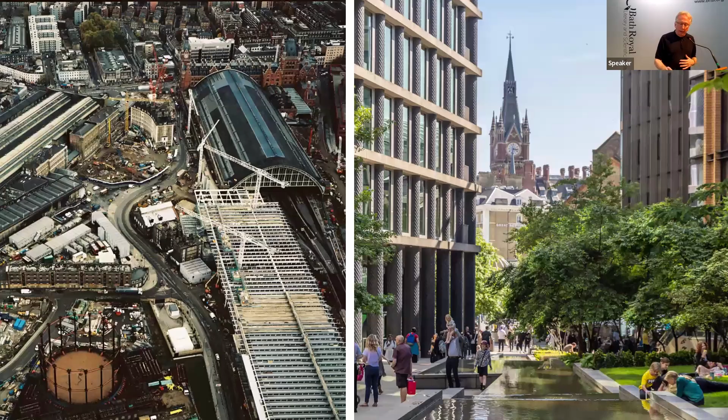And one more picture, just as a kind of contrast. On the left-hand side, you can see the site again as we started working on it. That's King's Cross Station on the left, St Pancras on the right, and that's the new Eurostar terminal, the roof of it being built on the bottom right.

And you can see the complete chaos that existed between the two buildings at the time. And that wasn't just the product of the construction of the station. That was, in a way, a characteristic of how that area existed at the time.

And then the photo on the right is now standing or sitting in Pancras Square, and you can see a few landmarks there, therefore kind of repositioned into the new city. So you can see obviously the tower of St Pancras on the right and on the left.

You can see the Great Northern Hotel here, and here that's the same gable there, and then just in here you can see the German Gymnasium, which is just sort of sitting there in the project. So part of the project was, in a way, while adding new things, very much to give places for some of the historic buildings that we were able to save.

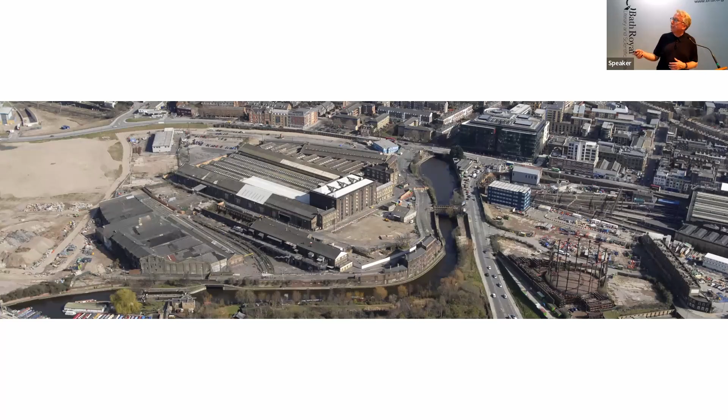Well, many of them, but perhaps the most significant being the granary building here and the transit sheds which lay out behind them. So we kept as many of the historic buildings as we could, more than just the listed structures, through a kind of blindingly obvious realization that these were assets and these would really make a difference to the character of the place as the scheme evolved around them.

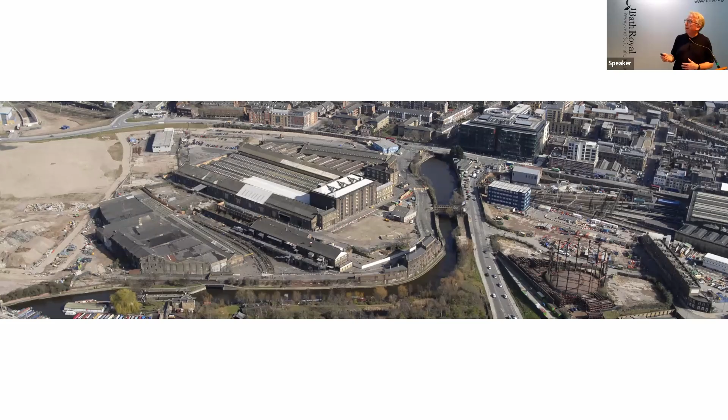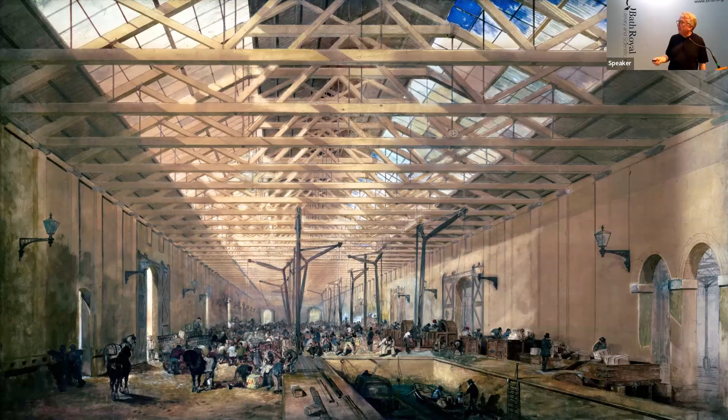And then when you go into the transit sheds on the back, you can just about make out that here you're looking at canal boats, which are now nestling side by side with railway trains. So the goods are being transferred directly from canal to railway. It was the first intermodal transport building to be built in the world. So it's a really important building.

And when you know that that's where the canal basin was, you also perhaps give some meaning to why we put all the fountains there. Because the fountains provide a memory of where the canal basin was, which is important to us, but they are also incredibly important in terms of the role of King's Cross as a kind of social condenser. In another way, it's because the fountains bring families and young children in that the place has been so happily assimilated into its context, which includes very impoverished neighbourhoods really on either side. So the social aspect of the fountains has been really key.

The plan of King's Cross works really through a succession of a series of spaces: from a square outside the station here, a second square, Pancras Square here, and a boulevard connecting to the canal.

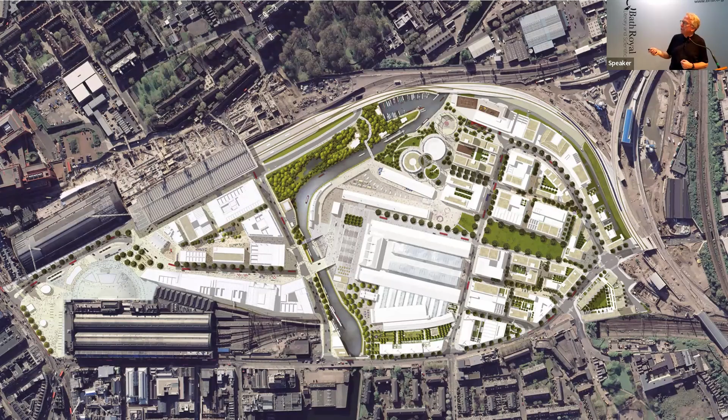Granary Square at the heart of the project here, and then Lewis Cubitt Square and Lewis Cubitt Park leading up to the north. And then a succession of more informal spaces along the edge of the canal, and occasionally a little formal square dropped into the fabric of the buildings on either side.

I've already shown you a picture of Pancras Square, so next is Granary Square. It's interesting because it's almost an as-found space, we haven't really shaped it very much. We have made some little insertions, a little group of trees and a pub on the end, which actually are very important in defining the space in that dimension.

And then, of course, there's steps leading down to the canal, to the towpath. One of the great benefits of building here has been that the end of the towpath, which was really a no-go zone, a dangerous place to be at any time of day, is now absolutely integrated into London's public realm.

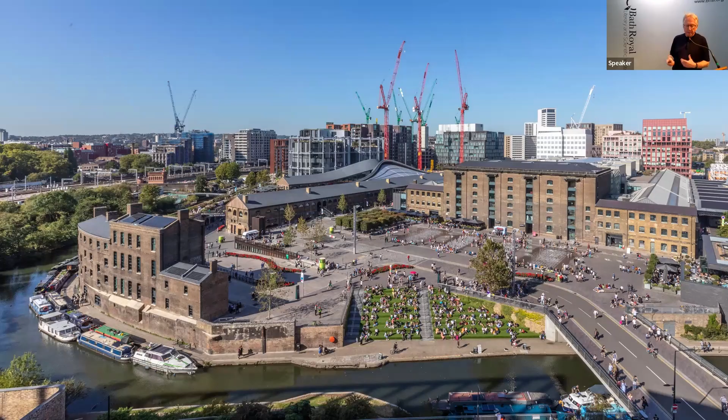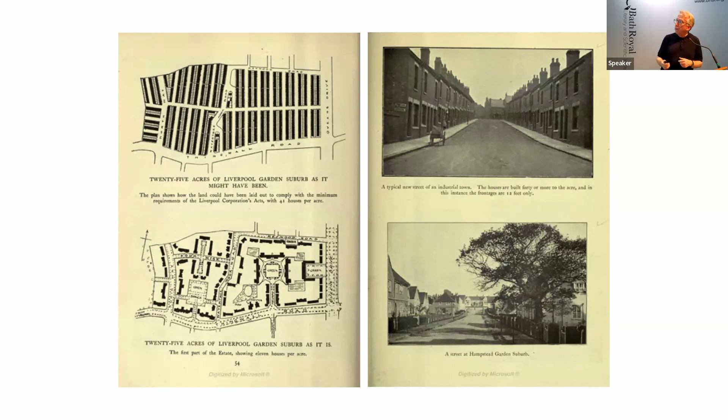And in the 1919 Planning Act, that density became established as a kind of given maximum density for new housing development. And really, it is that proposition which gave rise to the character of housing in the interwar period in this country, and particularly in London.

And it coincided with the sort of Metroland moment—when the suburban railways were being built and more roads were being built. So it suddenly became much easier to get into the centre. The travelling distance wasn't a problem anymore. So that distance could grow, but densities remained very, very low everywhere.

And funnily enough, in Bath, it's interesting when you look at the Abercrombie plan for Bath, 1945, which was obviously a critical moment for Bath, and in a way laid the ground for the sack of Bath to happen some 20-25 years later.

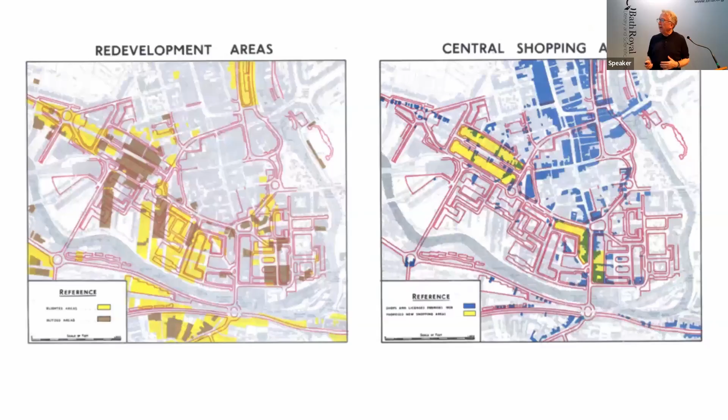Interestingly, I just found this recently, that included in that plan is Twerton. They actually show an image of the plans proposed for Twerton as an exemplar, if you like, of how housing might be built. And in the end, of course, Twerton isn't really an exemplar.

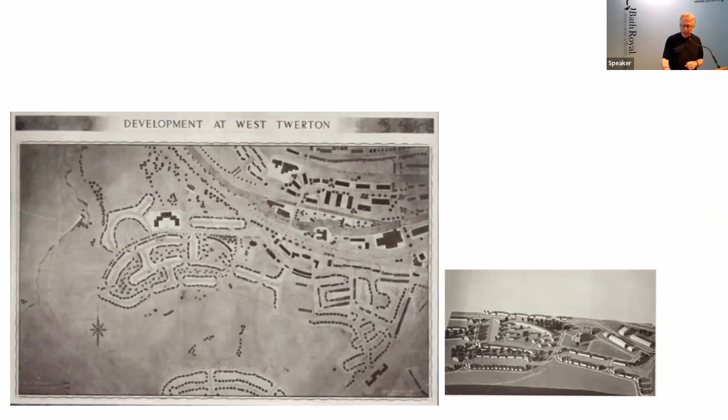It's actually, in a way, that density is part of the problem, I think, in Twerton. Just having more open space isn't enough. In the end, it is about the relationships of buildings to open space, of roads to open space. It's about movement and overlooking and all sorts of other things which go together to make successful housing.

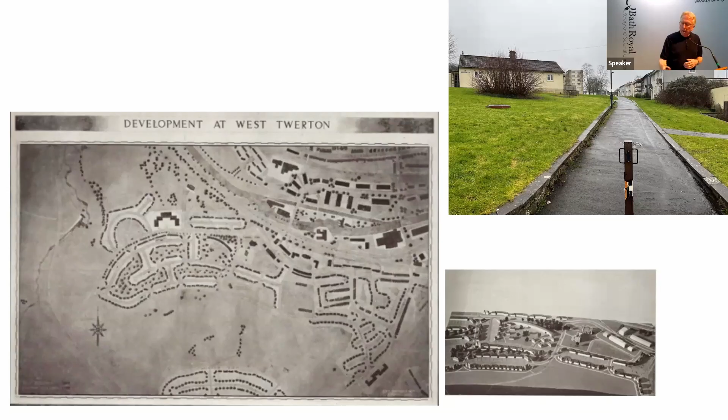London, having reached this point where it's growing within the whole of its borders, has a problem which you're all familiar with here, which is that it's surrounded by a green belt. So it has no room to expand, it's reached the limits of expansion. That's why the opportunity areas came about, because the only way of growing London was to increase the density. That became the only option, to look at parts of London where the density should grow.

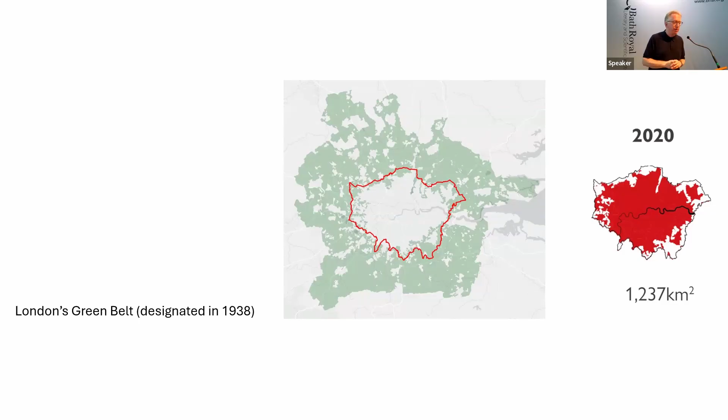So the opportunity areas are saying, well, if they're going to grow, the places for that to happen are where there's really good public transport. That's the only place we should be doing it. So we look at all those areas where there's stations, where there's capacity to build around stations, and we should let the population grow in those locations.

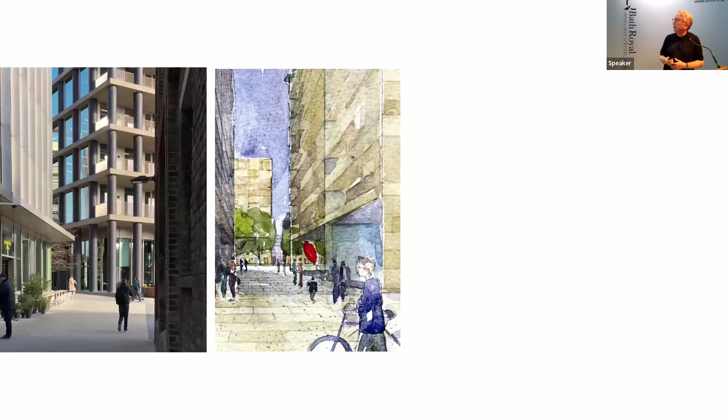And at King's Cross, certainly in the southern half of the site, we tried to work with that sort of scale, those kind of dimensions. And in the end, I think it's one of the things which has given that part of King's Cross a sort of human scale.

It's a kind of paradox, isn't it? We're putting things closer together. In planning speak, these are canyons, this is a canyon effect. Normally it's dismissed for that, but actually what it's doing is creating atmosphere and a sense of an easy place to be.

Actually, I could point another Eric Parry building out. There you go, there's another one.

And also it's meant at King's Cross that we try to make sure the things which in other projects have been assumed to need a huge amount of space, like a primary school, we've tried to draw into the heart of the city in this way, where we have a lot of people now living around about it. So these are the children of the primary school.

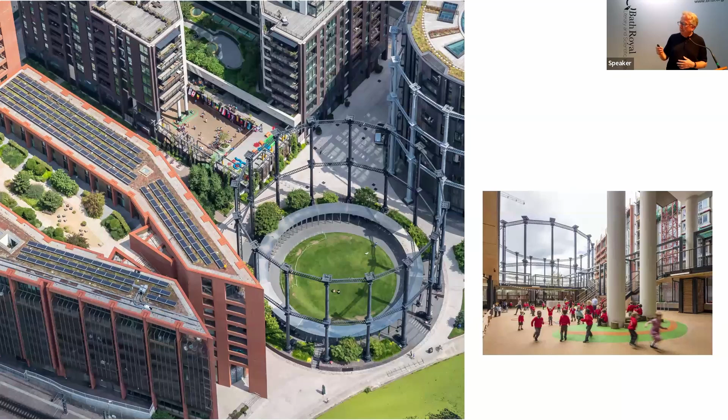They were playing in a park made out of one of the gas holders, but their actual playground is there, and the school is sitting underneath one of these residential buildings. And it's a fantastic combination.

The school works incredibly well for the school, and it works very well for everybody who lives and works around about it. And my particular pleasure from this one is that it's not just one school, there's two schools - a primary school and a school for deaf children co-located on the site. And because they're co-located, all the primary school children learn sign language. It's a rather wonderful outcome.

Now, in a way, building in the heart of London is one thing, but the opportunity areas are saying you've got to look at other areas to build more densely and taller as well. And this is Tottenham Hale, which is to the north of London, on the main railway line to Cambridge. So it was one of those areas where density was required.

We're actually sitting on the Lee River here, hence the barge, and we're opening out across another bridge to a natural park, to an open landscape to do with the reservoirs and the river.

And along the canal there, you can see, I think these are probably 8-story buildings. So it's a relatively high scale, but in a sense quite appropriate in terms of its wider context. But as you go into the scheme, you can see there are taller buildings again. So this is a significant jump in scale.

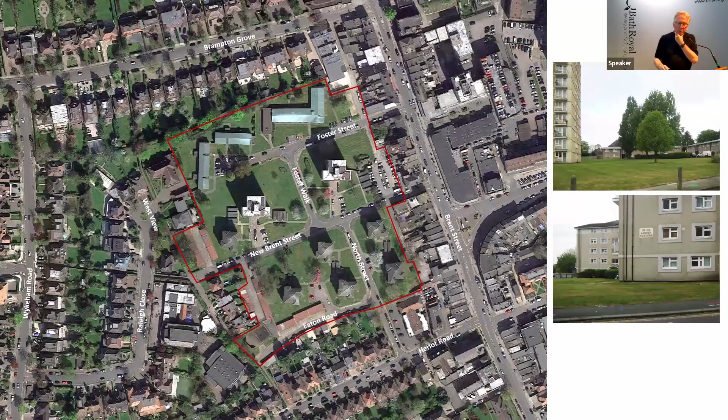It's interesting here that the tall buildings are private, built to rent, and all the social housing is actually in the lower buildings, which I think makes sense to me. It's also meant that we've gone back into areas developed in the 1960s and tried to think again about how they might evolve and how we might build more homes in these locations.

This is a project for a council, Barnet Council in North London. You can see the red line of the site, and you can probably begin to work out yourselves what's happened here. You're sitting in a late 19th, early 20th century part of the city, with a lot of rows of terraces and a very strong street grid, east-west. You can see that street grid surviving in part across the scheme.

Then at a certain point in the 60s they cleared away what were probably seen as slums, and opened up the landscape. They made a big space, and then placed within it a series of new buildings - some L-shaped, some taller, others dotted around the landscape.

That's roughly what the space looks like. But around the edges of the space, it was chaos really, because all you had was the residual - what was left after the buildings were cleared away. So although housing was being built there, the place that had been made was very unsatisfactory. It wasn't a complete failure though, and for the residents it meant something.

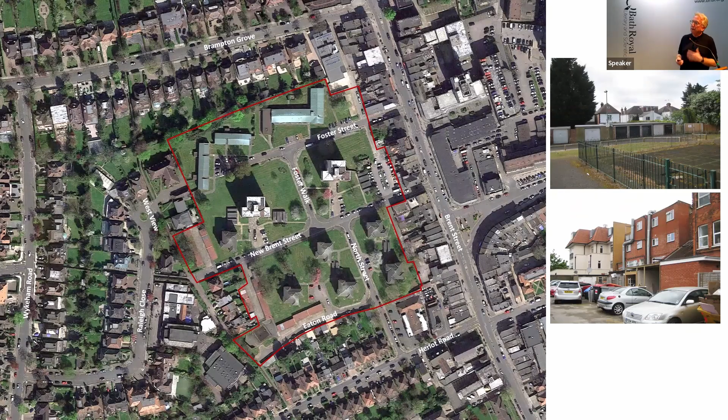That was one of the things we had to learn as we began to work on it. This was a project where we worked through probably a year of consultation with the people living on the site, exploring the best way of adding new housing, which obviously raises a question - you're giving up green space to build housing. Is that the right thing to do?

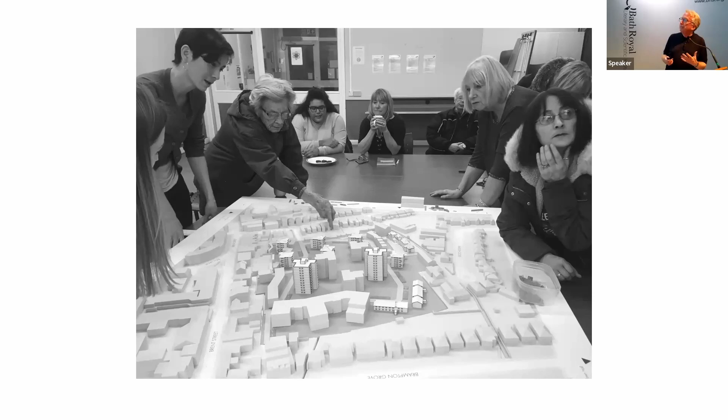But by making this investment we were able to invest significantly in the whole site, which is really what the residents ended up realizing and wanting to buy into. To our surprise, the scheme we ended with was not the scheme we began with. We began thinking we might take the freestanding buildings and conjoin them to make courtyards. We also wondered about just reinstating the streets - could we put the streets back and make sense of that?

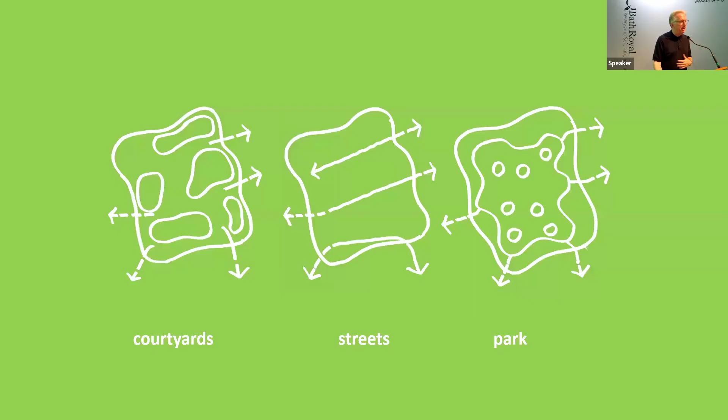But in the end, the last option was the one the residents were most interested in. Could they keep their park, but could we make a much, much better park and a more successful relationship between the buildings? And that's exactly what we pursued.

So in this overall plan you can see we've added one, two, three new buildings into the park, but a lot of effort has gone into remaking the edge of the site so it's now a space with a very clear perimeter. Everybody's looking into the park, so the community is, if you like, built around the park.

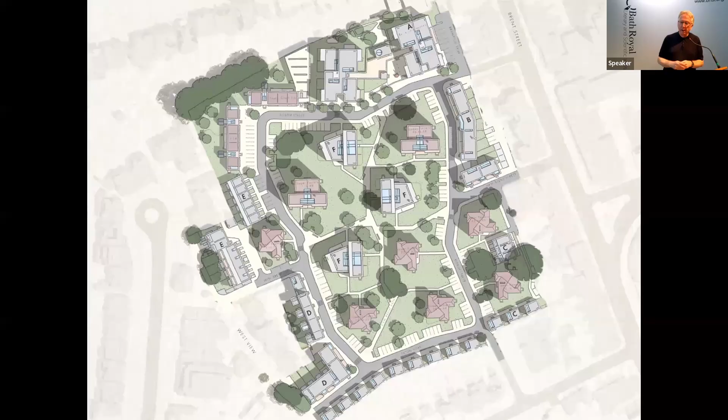It's a little detail, but it's the sort of thing which does make a difference in the end - it's what architects can do. If you look at the plans of the buildings built in the 60s, they're always aligned north-south. That was the one convention - you forgot about the plan of the city and just aligned things north-south. It's very common.

They were aligned north-south and really had no spatial relationship - the positions of their facades had nothing to do with the landscape that surrounded them. Whereas the buildings we've proposed, you'll see they all have two geometries inside them.

They all have the north-south geometry because we want to find relationships with the existing buildings, but they also all have this east-west geometry related to the original streets, which influences a lot of things about the positions of the buildings on the edge of the park.

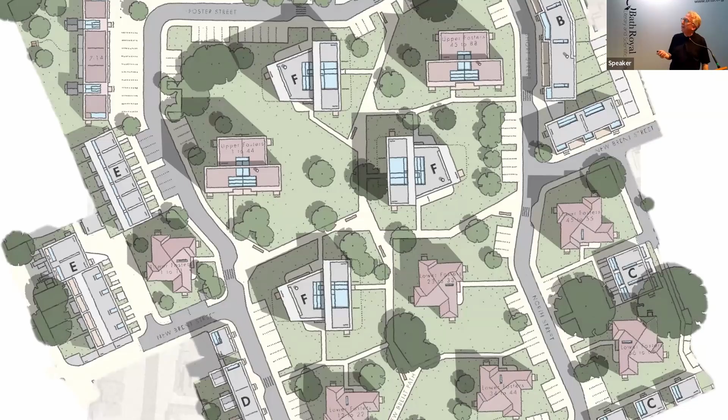Because of that, we hope—this project is still on site, so I can't quite convince you at this stage—but what we're trying to do is make sure we're generating open spaces which have a kind of order to them because of the relationships between the buildings. That little trick in the design of the building is something that does that.

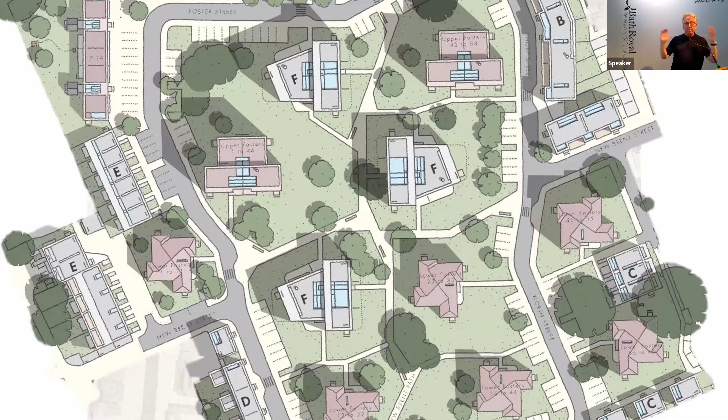For me, that's a fundamental point which I think very often gets neglected. Buildings, of course, have to house things inside them, so their plan is generated to a great degree by how they work internally. But buildings are also fundamentally the things which define external space—that's the other job they have. Architects should always be thinking about whether they're making the best possible external space as well as the best possible internal space.

One of the things that followed on from King's Cross—because it began in 2000, it wasn't really inspired by sustainability. Sustainability was there then, we knew about it, we were thinking about it, but it wasn't quite the kind of force that it is now, since the climate emergency has become more important.

So when we look back at the master plan and the evolution of King's Cross, it was clear that when we took individual buildings, we really could achieve very high standards of environmental performance. Many of the buildings at King's Cross are BREEAM outstanding—getting that level very high was quite easy.

This is a page I think I've taken from Transition Bath's website, but this is just the statement about the fact that Bath has the highest home efficiency standards in the UK. So you can push these standards very high, which is what's happening now.

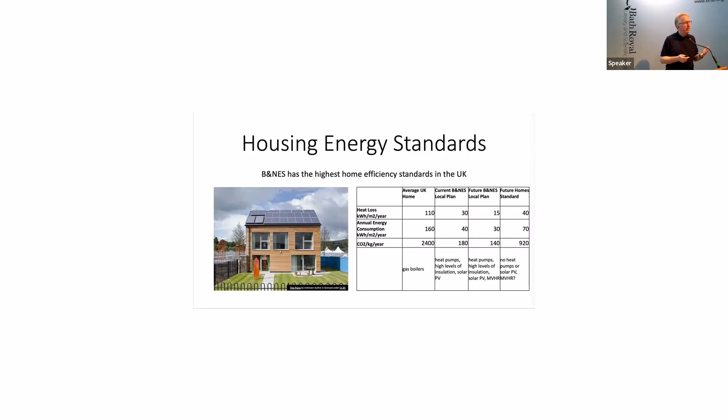But it's actually much harder really to say, well, what do you do when you're designing a master plan or designing a piece of city? What is it that then shapes the way that kind of thinking plays out? And there are lots of things you can think about.

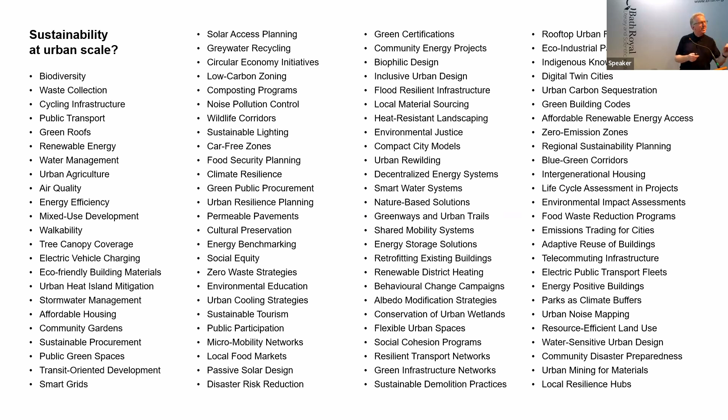So there's no shortage of things to consider when you think about a city and how to make it sustainable. But in a way, not all of those are actually going to help you in the end decide what it is that you're going to draw. They're not quite getting there—they're more sort of policy things.

So I rely on this argument about sustainability, which is a very simple one: sustainability means making the most of what you have and reducing what you need. That's a kind of imperative that I think drives the way we have to think.

So in a master plan now, we begin by looking hard, as we did at King's Cross, at all the buildings that are on the site. We want to see what we can get out of those. So now we don't just keep beautiful historic buildings, we keep all sorts of rubbish—actually, we keep all sorts of buildings that have just been built for whatever reason, acknowledging the fact that they can have an extended role.

I mean, I say all sorts of rubbish—that's what they felt like when we first saw them. Of course, they'll be wonderful once they're dealt with.

And the other thing which I think is fundamental is the issue I've already raised, really, which is about density and the fundamental need for us to try and build more compactly, particularly when we build housing.

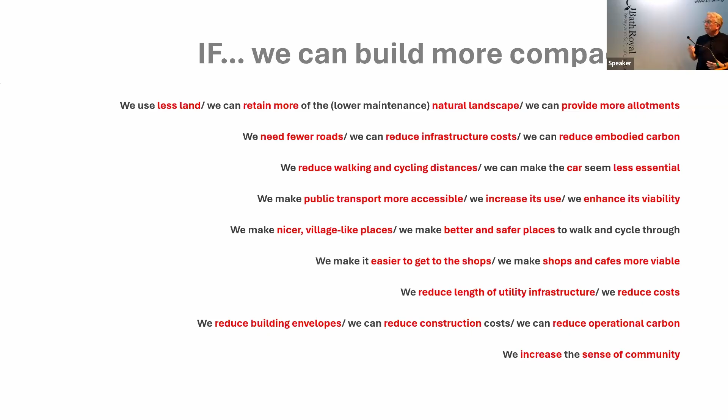This is a list—I have no idea whether you can read any of that, but I'll pick out a couple of things. If we could build more compactly, we use less land, we can retain more of the natural landscape, we need fewer roads, we reduce infrastructure costs. We can make the car seem less essential, make public transport more accessible and more viable, make nicer village-like places—in my terms, we do. We make it easier to get to the shops, so shops and cafes become more viable, we reduce building envelopes so we reduce construction costs, and we increase the sense of community. These are all trade-offs, I think.

That sort of thinking wasn't done by me about this project, actually, but about another project elsewhere, trying to think about the arguments for building compactly. But it seems to me it's certainly one of the big issues Bath has to think about now, because there's a requirement to propose land for 28,000 new homes across the area for a 20-year land supply. That's a huge responsibility, and thinking about what that means becomes a key part of the planners' job, but also something that exercises my mind in the role I've got.

I think this whole question of sustainability, and how it impacts the world for us architects and urbanists, but actually for all of us, means certain qualities suddenly become uppermost. Things have really changed around in the way we think.

I was on a design awards jury recently, and it occurred to me that when I'd been on one about 20 years ago, everybody talked about things not being generous enough, and praised the generosity of things. Now on design awards, people talk about the economy of the structure and the minimum use of material, and the whole sense of what is right, what should we be doing, how should we be designing. It's absolutely a moment of transition, to use the word. So something is happening at the moment.

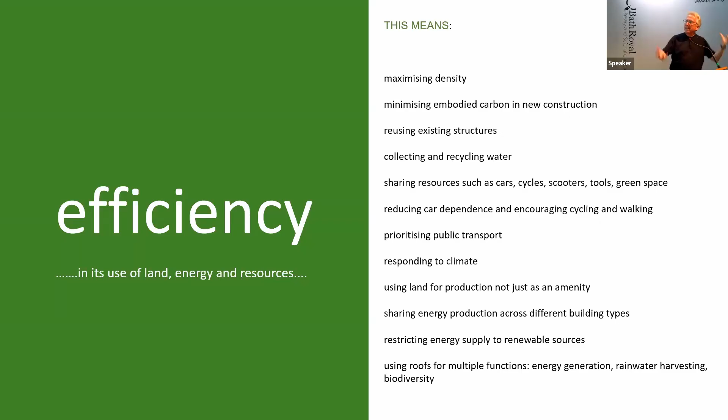So efficiency is incredibly important, and connectivity too, I think, also incredibly important. It's important everywhere, in cities, but I think it's a particular challenge across North East Somerset. How do you achieve that level of connectivity and movement for people where the car is so dominant? What are the alternatives to that? How can one deal with that?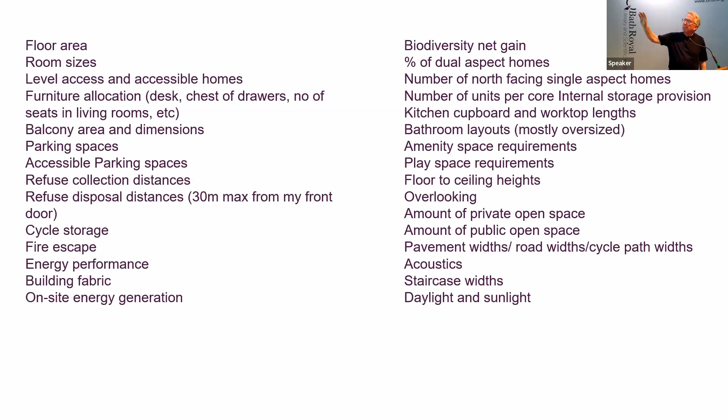It is a kind of curiosity that when you look at housing design in this country, it is hugely regulated. There are an enormous number of standards which define everything about the housing you design, from floor areas of individual units - these are quite precise numbers you have to conform with - room sizes, the sizes of balconies, how many cycles you have to accommodate, the energy performance of the building, the nature of the building fabric, the amount of amenity space you have to provide, overlooking, private space. All these things are firmly regulated and standardized.

And of course that's a really good thing, and yet it's also a slightly difficult thing, because as we all know, once you have a minimum standard, that becomes the norm. So everybody builds now to one standard, which in a way is a shame, but it's hard to know now how to overcome that.

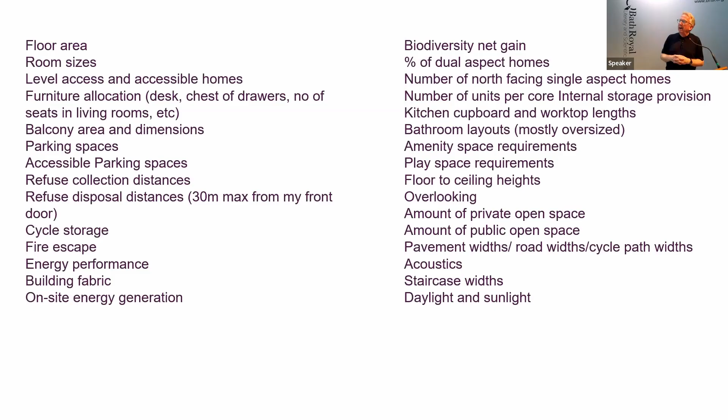But what is really striking is that there's no equivalent standard for the provision of public transport to housing. There's nothing which says, we'll build here and promise to give you, within 15 minutes' walk, a bus service every 15 minutes running for 15 hours a day. There's no quid pro quo saying this is what we'll give you in order to allow you to live here. I think that issue of public transport has to be tackled by somebody somewhere - I guess in the end it's government - unless public transport is taken much more seriously than it is at the moment.

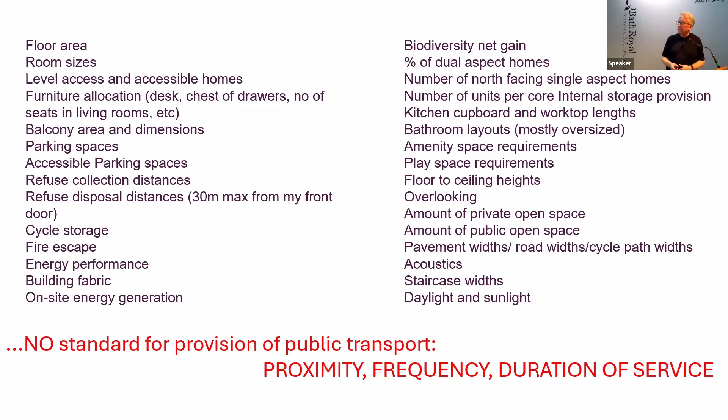Really, ever since Thatcher and the privatisation of buses, it's always been on the back foot in this country. And if public transport is going to work, walkability is absolutely key to that. Walkability is an odd word because it's not really a quality itself - there are characteristics you're looking for to make something walkable.

I think the fact that walking becomes the nicest way of moving about is really important. And of course, it's also a virtuous circle. If more people walk down a street, then the cafe located there trades better, and more people want to go there, and so on. So thinking about walkability is fundamental to projects at every scale, whether we're talking about a village, a town, or the biggest city. Walkability is still a fundamental aspect of all urbanism. How do we achieve that? How do we make that work?

The great campaigner on behalf of walkability was Jane Jacobs, who some of you will know well, others won't. She wrote this extraordinary big book in 1961, and she was a campaigner against the demolition of huge areas of New York tenement housing. She was the first person who really recognized that in that housing, in that urban structure, there were physical qualities and social qualities which should be protected and preserved, providing a very sound basis for a city. And she was absolutely spot on.

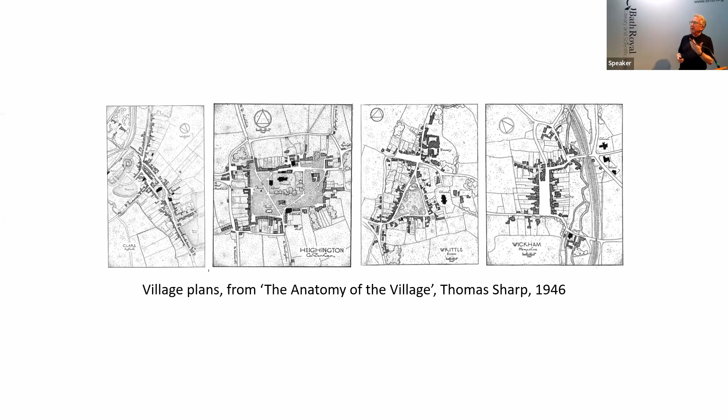He was also vehemently opposed to the Garden City. He fought it all the time because he felt they were misleading themselves in thinking you could bring the city and the countryside together—that was a mistake. In the end, there were qualities in the countryside and qualities in the city, and he wanted to really understand what they were. He produced beautiful studies of English villages where he plotted and drew them just to understand their spatial configuration and how the centres of these villages were defined, as a deliberate process of beginning to think about how to design housing. He had one or two very modest commissions to design new villages up in Northumberland, which in the end hardly came to anything.

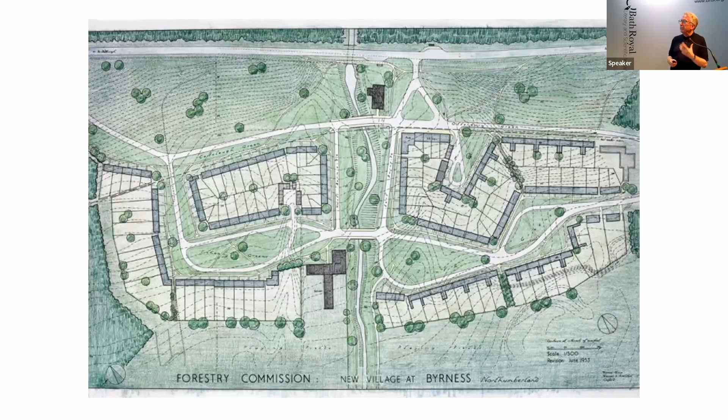But interesting plans, and interesting how his interpretation of what would make a successful village in terms of its enclosure is followed through. So, I'm getting there.

One more point about qualities or characteristics which now seem much more important than we'd realised before, and this is diversity. In particular, what's important to us at King's Cross is the incredible mixture of uses within the site. It probably began—we all thought it would be housing and offices, that was sort of easy. But in the end, with an incredibly imaginative client, there's nearly everything there: a swimming pool, a gym, a library, a hotel, local authority offices, schools, university buildings.

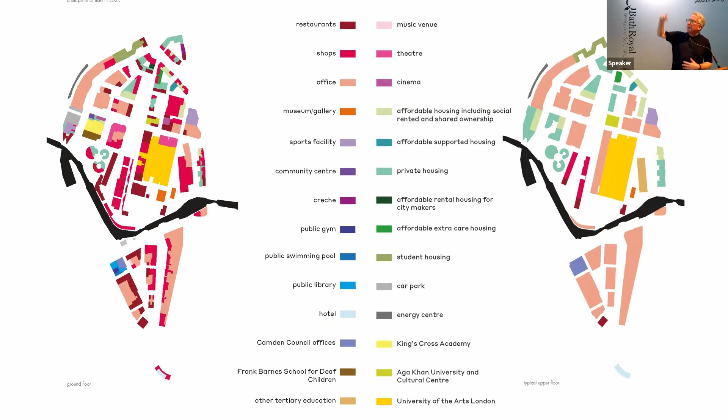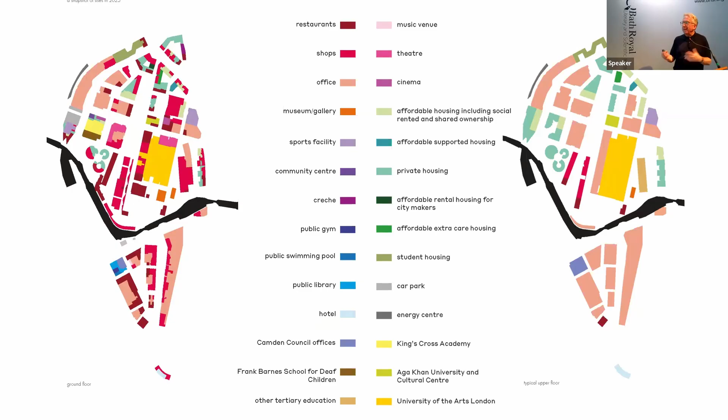There's all sorts of different types of housing, all sorts of different tenures of housing, so people from different generations living there. There's no question in our mind on projects that we go forward with, that sense of the mix of things is really what enriches places and where we can achieve that. Of course, you can't always. There's also another type of place where you have to think, what is a residential environment? But there's certainly this sense of diversity being a strength.

So I think that's a real strength. It's interesting that a city can be all these things at once, and that's a kind of goal that we should be aiming for. And just a reminder, really, that this is completely the opposite of what Abercrombie and his contemporaries were imagining was going to happen in the future.

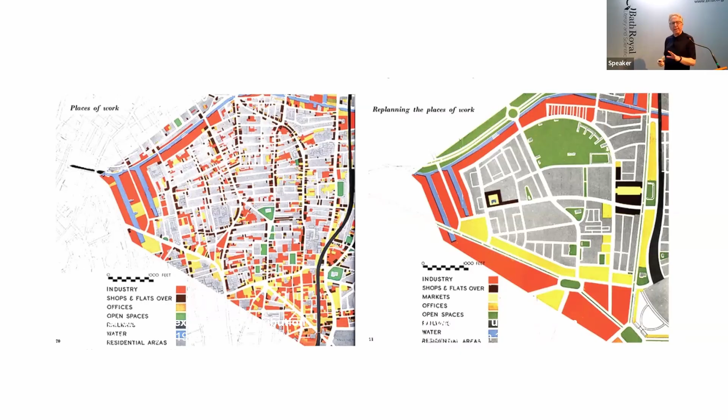These are drawings taken from Abercrombie's London plan, which he did a couple of years before Bath. On the left-hand side is a study of Shoreditch, in which they recorded all the different uses that were on the ground. Looks a bit like our King's Cross plan. And on the right is how they thought it should be replanned, with every usage put together into different areas within the city. So they were headed in a completely opposite direction at that point.

And that idea about how to organise things came through in documents that were put out immediately after the war, in '46 and '47. This is taken from one of those, where you can see on the left-hand side the survey area. I mean, these are pretend, these aren't real. So a pretend survey area with a kind of chaos of things going on in it. Then the introduction of a new road system in the middle drawing, and then the organisation of the uses around that. So there was a kind of rational move going on there.

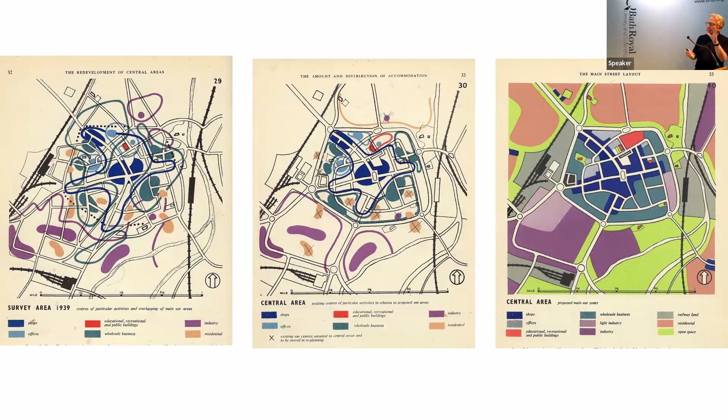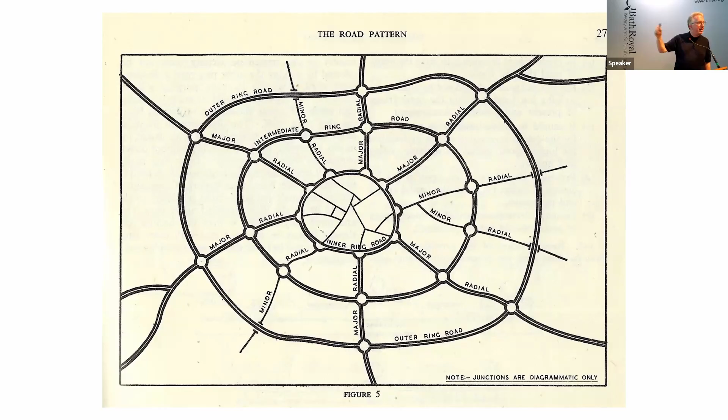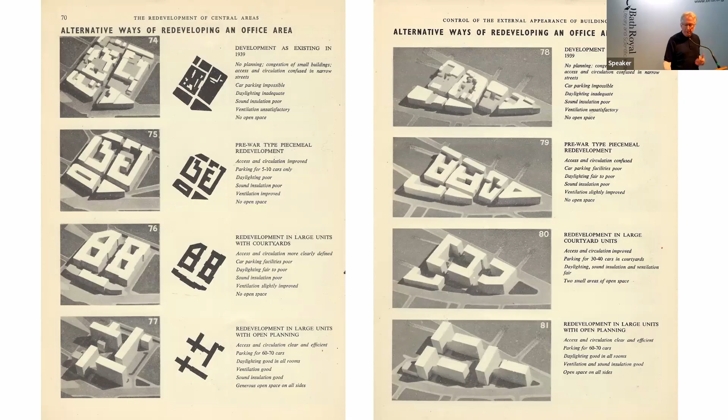The two documents I'm referring to are this one, Design and Layout of Roads in Built-Up Areas, 1946, which was the document where the idea of the ring road was really put into British planning, and became a given for any city embarking on this. The second one was the redevelopment of central areas, looking at the hearts of towns and cities, seeing how the chaos they were witnessing, this density in existing towns, should actually be replaced ideally by buildings like this, pulled apart, placed apart from each other, with open space in between, and of course with no sense in which they were playing their part within the city. They become a kind of completely internalised organisation.

Those documents weren't compulsory, they were advisory actually, but they had a huge impact on cities all the way across the country. The one on the left is Reading, the one on the right, I think, is Northampton. For me, to try and characterise it, I feel what happened was a kind of aspatial urbanism. In other words, an urbanism in which you weren't concerned with the way in which buildings made external space. You were interested in buildings and maybe landscape, but not in the way they made external space.

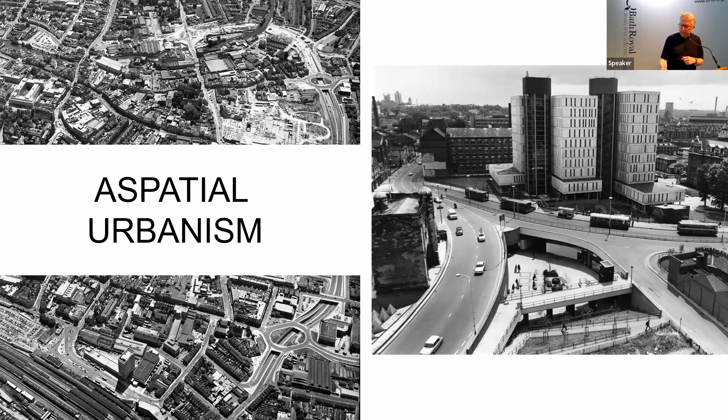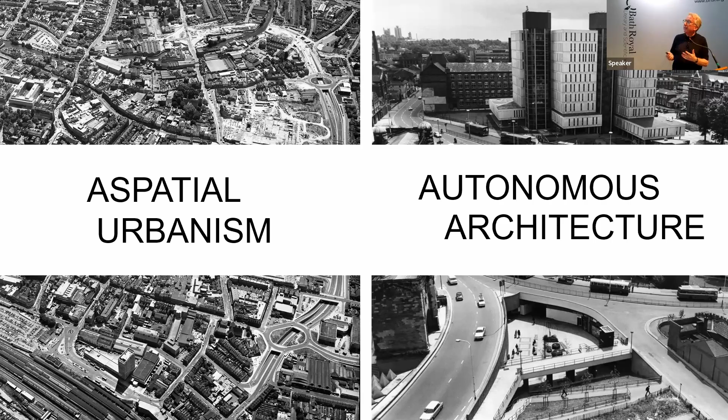And then in terms of buildings, it was what I would describe as autonomous architecture. In other words, an architecture which was internally driven from its own logic, its own internal logic. It wasn't thinking about any of its external relationships. For a long time, that, I think, did characterise development in this country, and to some extent, all the way over the world. But I think already that has changed.

Of course, in Bath, you were lucky, you escaped most of this, but you do have Pines Way, which to me is the one shock horror moment in Bath. There's a big road gyratory sitting in the middle. So if I could do anything in Bath while I'm here, I'd love to try and find a way of changing the nature of Pines Way.

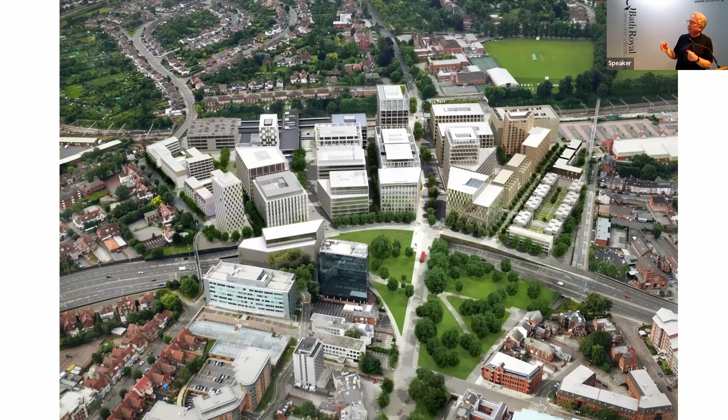What we've been working on over a few years now is a development of the land around the station, but also the replacement of that junction and the creation of a land bridge which connects the station and that development through into a direct route right into the city centre. Some of the buildings, two or three, are now built, but the landscape is now complete, and that connection between the station and the city has now been completely remade.

Now, Bath is clearly the antithesis of aspatial urbanism and autonomous architecture. I mean, it's absolutely exemplar of a place where the buildings create spaces. That is what it's all about, and that's why it's so absolutely extraordinary.

And in a way, it's the square and the circus and the street which connects it. I think the crescent is particularly interesting because if it was simply part of a circle, it would be okay. But what's amazing is that it's part of an ellipse, and that it curves back around and completes itself and produces these flat kind of palace facades onto the landscape. So it's an incredible piece of urban thinking, I think.

And although you might say, well, is it enclosing a space? It's looking onto the landscape. Absolutely, it's enclosing a space. To me, it's really doing that job in an extraordinary way.

But of course, Bath, it's not just that little sequence, it's everywhere in Bath. As you all know, this extraordinary succession of amazing spaces being built at different scales and different characters. But it is their presence as urban rooms of different kinds which is so strong.

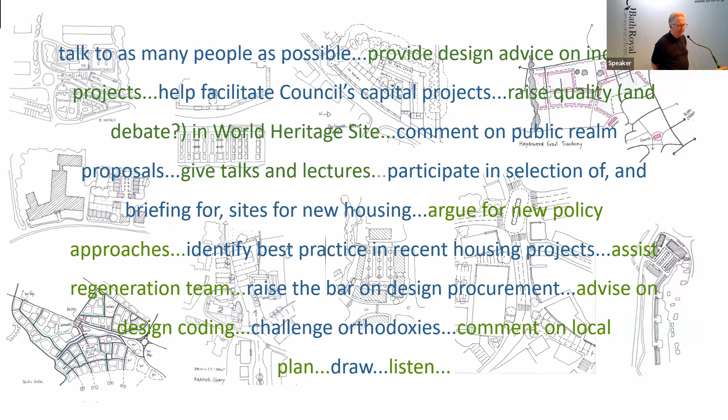You, in your travels and working in North London, King's Cross, Doha, Toronto, I see where you've been, have a particular ability to identify the particularity of Bath. This little village that we live in here has a particular character. That's what has to be identified.

I'm not sure whether that was a question in the end, but I am glad I'm not a lawyer, anyway, let's put it that way. Okay, we've got one more question. Yes, can you, yeah, sorry, you carry on. Oh, sorry.

So I really appreciated the discussion on sustainability with more urban density, public transportation, reducing commuting time. Is there discussion about making housing more resilient for hotter summers and not just reliant on AC? So looking at old European technology or turn of the century American apartments with ceiling fans, shutters on the outside, in relation to those minimum standards of making them not just reliant on air conditioning, but resilient structurally.

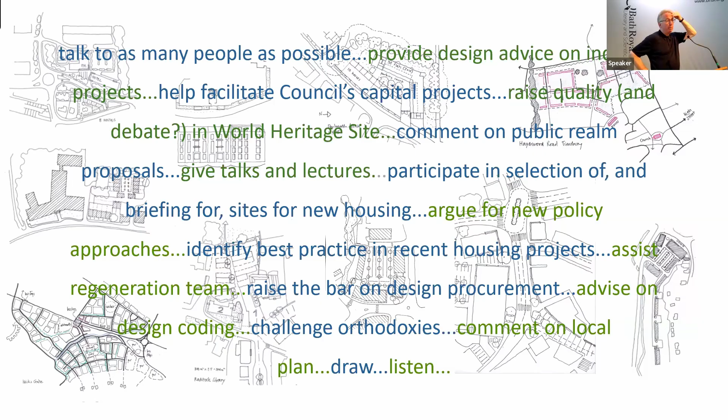Well, I mean, definitely, we don't want to be putting air conditioning into houses. So we're all having to think about the orientation. It changes the way we plan buildings now, so the sort of plan types that we produce are different. It's relatively easier to kind of do smaller scale homes. The changes in the fabric of our buildings are unbelievable now. I look at drawings...

The walls of our houses, the thickness has doubled in my lifetime, in my career as an architect. They've gone from, we used to design 270, and now we're up to sort of 575 or something. So that's been an incredible shift in quite a short period of time in terms of the way that we make our buildings. The fabric of the buildings has changed radically. The standards are very high now. Obviously there's a sort of two things going on here: in a sense, there's one about not having to heat your buildings anymore, so on the one hand you're trying to develop fabric which does that. And then obviously you have the kind of, which sometimes is almost the opposite problem, having to keep them cool. So I think that's a fundamental aspect of architecture.